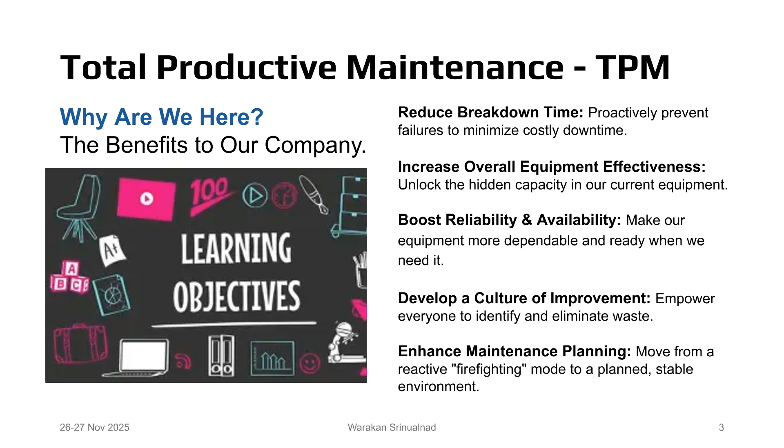This training is designed to be practical. Our goal is to equip you with specific skills. When you return to your work areas, you will be able to think of this as the start of a journey. These objectives are the first steps toward becoming a more effective and proactive team. Everything we cover is designed to help you achieve these outcomes.

So let's begin. What exactly is total productive maintenance? At its heart, TPM is not just a maintenance program. It's a fundamental change in how we think about our equipment and our roles. Traditionally, we have operators who run machines and a maintenance team that fixes them when they break. TPM challenges this. It says that keeping our equipment in top condition is everyone's job.

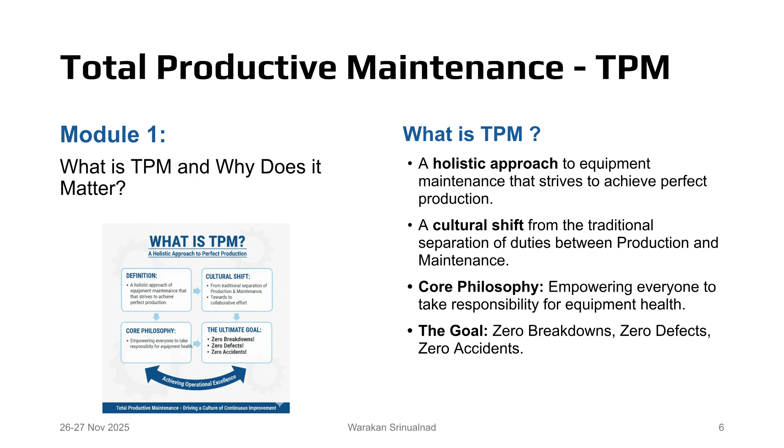The ultimate vision of TPM is a perfect production environment: no unexpected downtime, no products we have to scrap or rework, and no safety incidents. It's an ambitious goal, but TPM gives us the framework to pursue it.

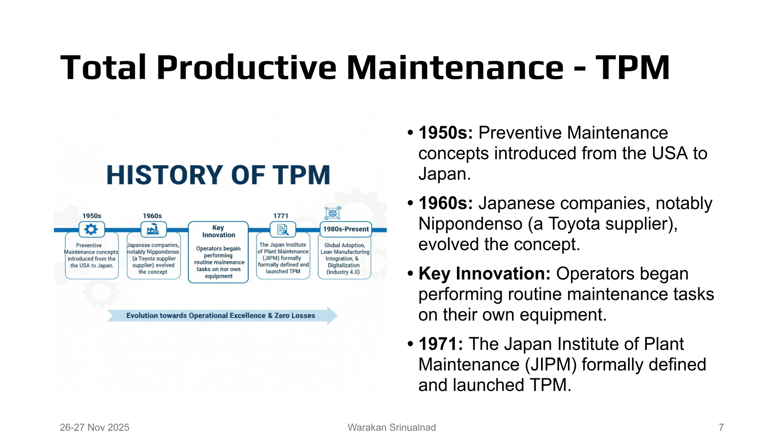TPM isn't a new fad. Its roots go back over 70 years. It started with the simple idea of preventative maintenance, fixing things before they break. The real breakthrough happened in Japan when they realized the people who know the machines best, the operators who use them every single day, were a powerful, untapped resource. By involving operators in the care of their machines, the idea of autonomous maintenance was born, and this became the cornerstone of the TPM philosophy we use today.

So why should we invest our time and energy into TPM? Because it delivers real, measurable results that impact our bottom line and our work environment. Think about the cost of an unexpected breakdown. Not just the repair parts and labor, but the lost production, the potential for late orders. TPM drastically reduces this by moving us from a reactive firefighting mode to a proactive, planned state.

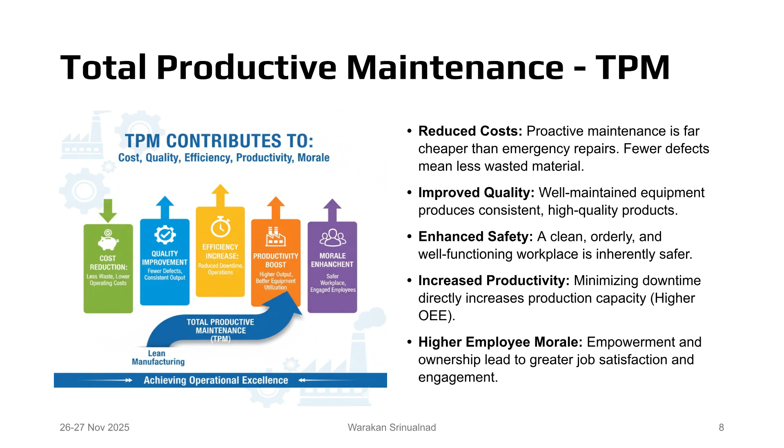It also creates a positive cycle. When operators feel ownership, they become more engaged. This leads to better equipment care, which results in fewer problems, less stress, and a safer workplace for everyone.

TPM is structured around 8 supporting activities, which we call pillars. These pillars work together as a complete system to eliminate losses and improve performance. Let's briefly go over what each one means.

One: Autonomous maintenance. This is about empowering operators to take ownership of their equipment's health through daily cleaning, inspection, and care. Two: Planned maintenance. This is the maintenance team's pillar. It's about moving from a reactive, firefighting mode to a proactive, scheduled maintenance system to achieve zero breakdowns. Three: Focused improvement, Kaizen. This involves forming small, cross-functional teams to systematically solve chronic problems and eliminate the 6 big losses.

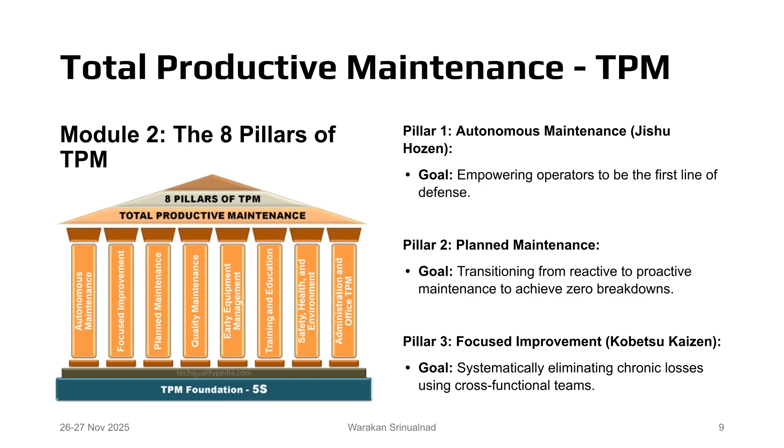Quality maintenance. This pillar focuses on ensuring equipment is capable of producing zero defects. We analyze how machine conditions affect product quality and build controls to prevent defects from occurring.

Early equipment management. We use our collective knowledge to design and install new equipment that is easy to operate and maintain, ensuring it's productive from day one.

Training and education. This is about systematically developing the skills of everyone involved, operators, maintenance technicians, and managers, to support the TPM goals.

Safety, health, and environment. This pillar focuses on creating a zero-accident workplace. It ensures that all improvements also lead to a safer and healthier environment.

TPM and administration. Finally, we apply the same principles of eliminating waste and improving processes to our administrative and office functions. Over the next two days, we will do a deep dive into the most critical pillars for getting started: autonomous maintenance, planned maintenance, and focused improvement.

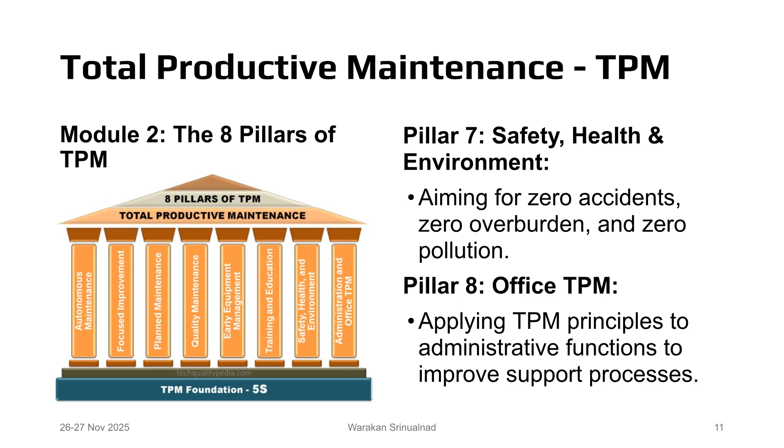As you saw in the diagram, all eight pillars rest on a solid foundation, 5S. Without a clean, organized, and standardized workplace, we cannot succeed with TPM. It is the non-negotiable starting point.

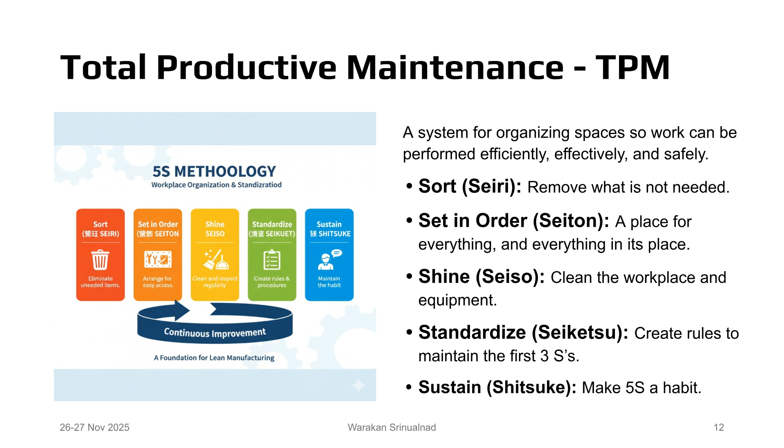5S is more than just housekeeping. Shine, for example, is not just about making things look good. It's a form of inspection. When you are cleaning a machine, you will notice oil leaks, loose bolts, cracks, and other early warning signs of a problem. A successful 5S program creates a visual workplace where abnormalities, things that are out of place or wrong, stand out immediately, making it easier for everyone to maintain standards.

Now we move to the first and most important pillar: autonomous maintenance. The Japanese term is jishu hozen. This is where the culture shift really happens. We are developing our operators into the first line of defense for equipment health.

Let's be clear, we are not trying to eliminate the maintenance department. We are freeing them up from fighting daily, minor fires, so they can focus on higher-level tasks like major repairs, predictive maintenance, and complex problem-solving.

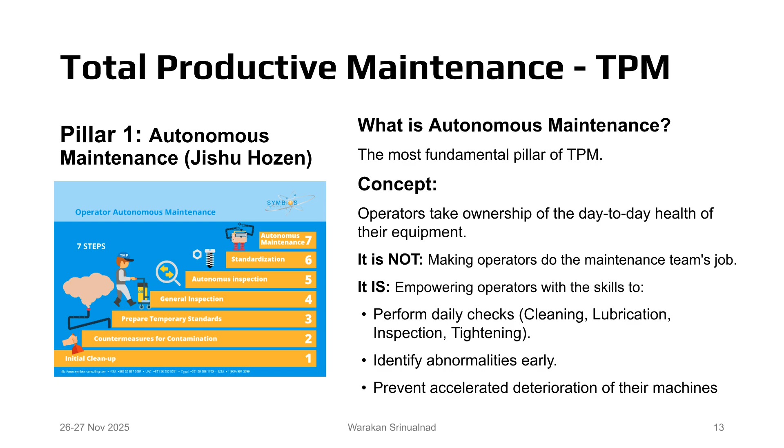Implementing autonomous maintenance is a structured, step-by-step process. We can't just tell operators it's your machine now. We have to provide training and a clear path forward.

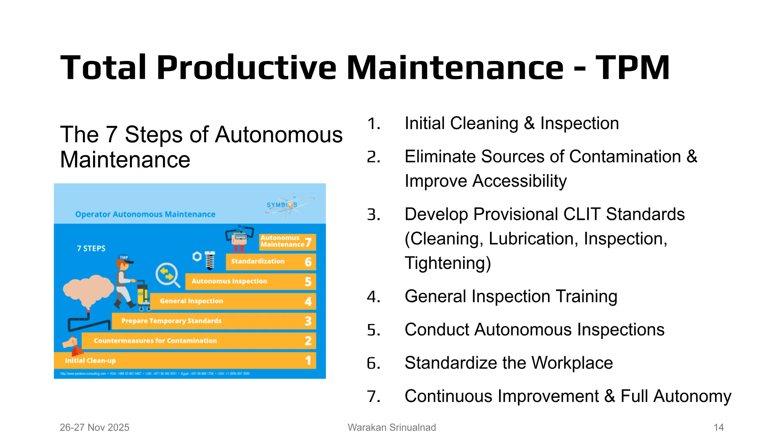These seven steps guide a team from the very basics of cleaning and inspecting to a state of full ownership, where they are actively improving the machine and their own standards. We will focus on the first few steps, as they provide the biggest initial impact. This afternoon, we'll do a workshop that simulates Step 1.

Step 1 is a powerful event. We're not just tidying up, we are performing a deep health check on the machine. As the team cleans, they will uncover problems that may have been hidden for years under layers of grime.

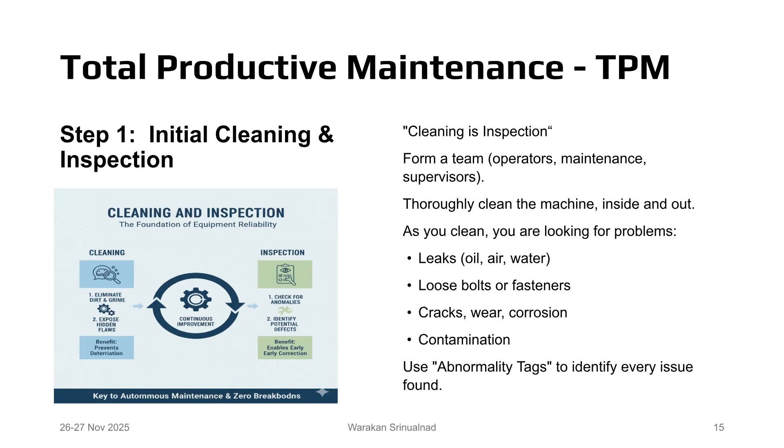This is why we say cleaning is inspection. Every problem we find is an opportunity to improve. We use simple tags, often red tags, to mark the location of every single abnormality. This makes the problems visible to everyone and creates a to-do list for the team.

To make AM work, we use simple, visual tools. Red tags are a great example. You don't need a complex work order system to get started. A tag clearly shows there is a problem here.

One-point lessons are a fantastic way to share knowledge. Instead of a thick, complicated manual, an OPL uses pictures and simple text to teach a single point. An operator can create one to teach a new team member, or a maintenance tech can create one to explain a specific inspection point. It's a way to capture and transfer skills quickly.

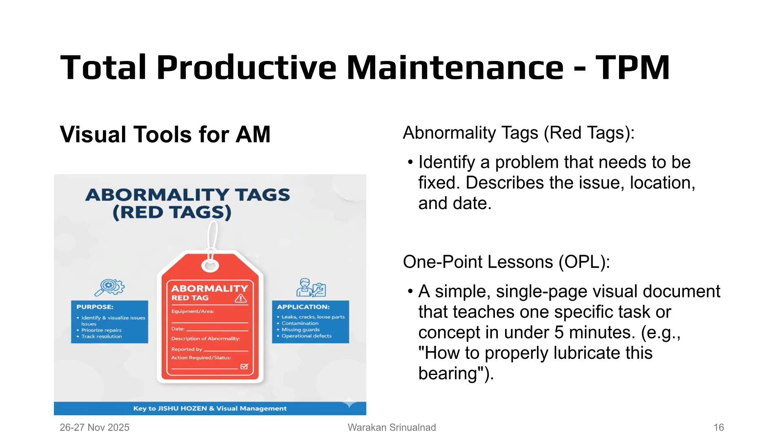While the operators are busy with autonomous maintenance, the maintenance department is focused on the planned maintenance pillar. This is about moving up the maintenance maturity ladder. Most organizations start in a reactive mode, constantly firefighting. The goal of this pillar is to move to a planned, scheduled environment.

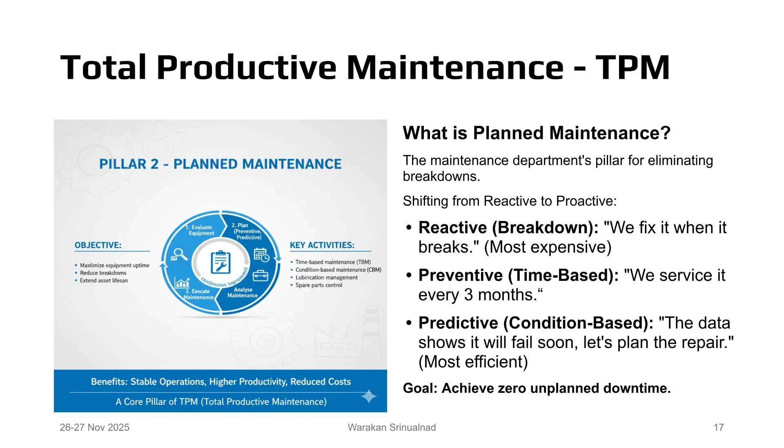Preventative maintenance is a good step, but predictive maintenance is the ultimate goal. This means using technology and data to intervene at the perfect moment, just before failure occurs.

A solid maintenance plan doesn't happen by accident. It's built on a structured process. We start by identifying our most critical equipment. We can't do everything at once, so we focus our efforts where they will have the biggest impact.

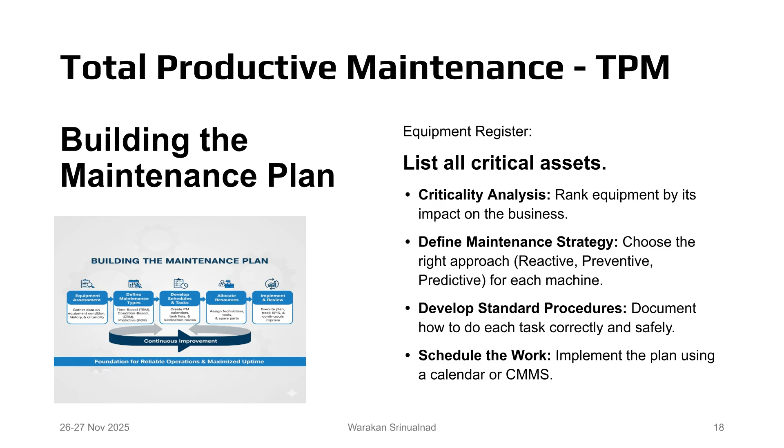For each machine, we decide the best strategy. A non-critical pump might be, quote, 'run to failure,' reactive, but our main production bottleneck will require a preventative or predictive strategy. Documenting our standard procedures is key, this ensures that the job is done correctly, safely, and consistently, no matter who is doing it.

Predictive maintenance, or PDM, is the advanced level of planned maintenance. It's like a doctor giving a machine a health checkup. Instead of changing a part because the calendar says so, we use technology to listen to the machine.

For example, vibration analysis can tell us that a bearing is starting to fail long before it gets hot or makes noise. This allows us to plan the repair for a scheduled shutdown, order the parts in advance, and avoid a catastrophic failure and unplanned downtime.